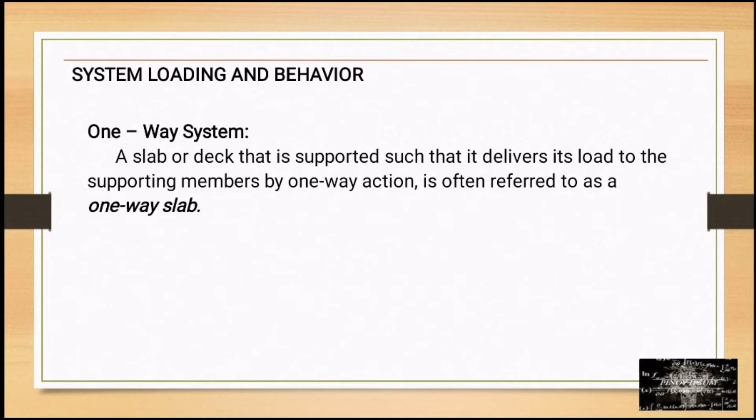We have two systems to determine whether the slab is two-way action or one-way action. Number one, a slab or deck that is supported such that it delivers its load to the supporting members by one-way action is often referred to as the one-way slab. According to ACI code, if the span ratio L over S is greater than 2, the slab will behave as one-way slab.

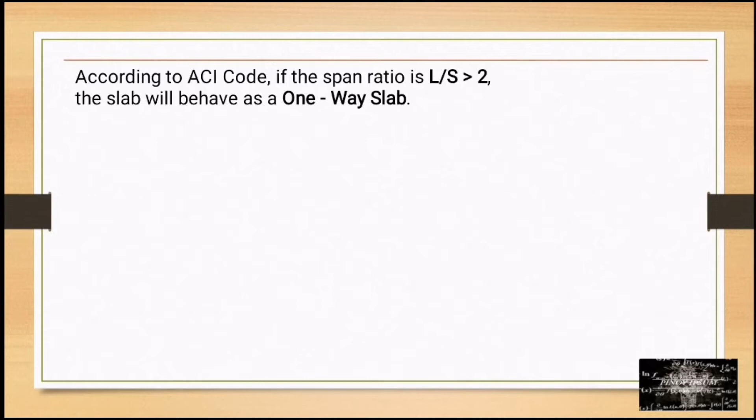So this is how it looks. We have WE equal to W times S over 2, expressed in kilonewton per meter, where L is the longer side, S is the smaller side, W is equal to the total load at slab expressed in kilopascal, and WE is equal to the equivalent uniform load expressed in kilonewton per meter.

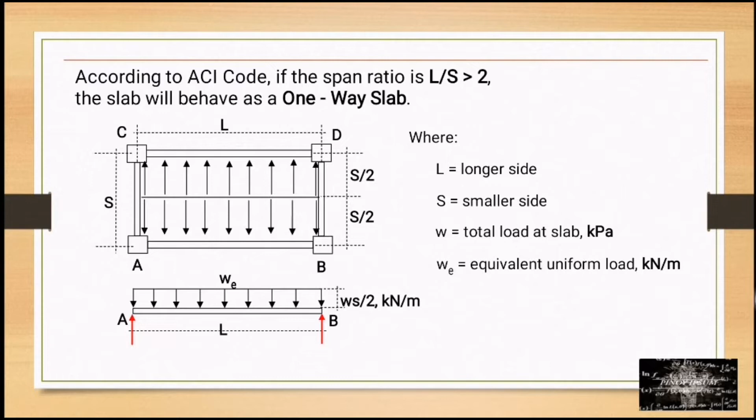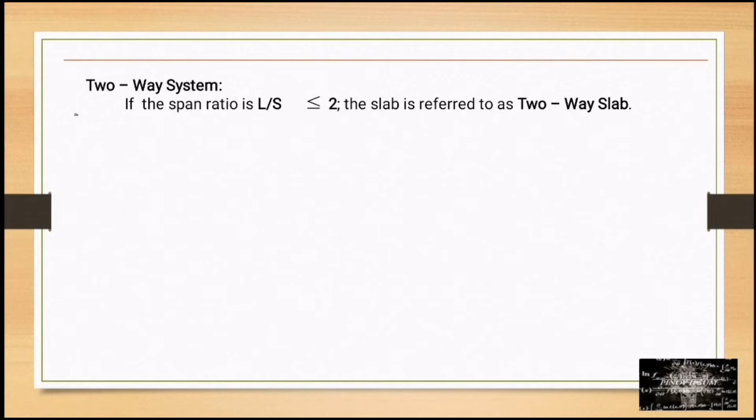Number 2, the two-way system. If the span ratio L over S is less than or equal to 2, the slab is referred to as the two-way slab. So this is how it looks - it has trapezoidal and triangular load, where L is the longer side and S is the smaller side.

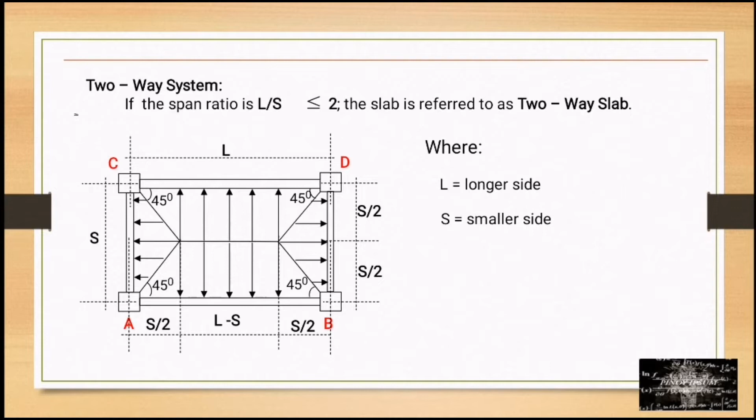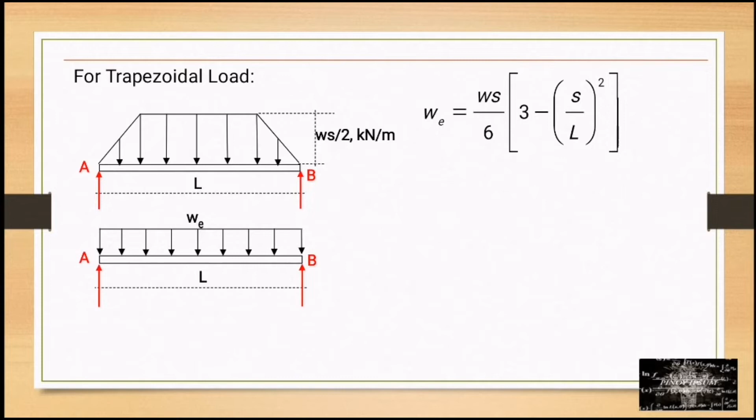For trapezoidal load, we have the intensity WS over 2 expressed in kilonewton per meter. For the conversion to uniform load, we have the formula WE equals WS over 6 times (3 minus (S over L) raised to 2), where W is the total load at slab expressed in kilopascal and WE is the equivalent uniform load for trapezoidal load expressed in kilonewton per meter.

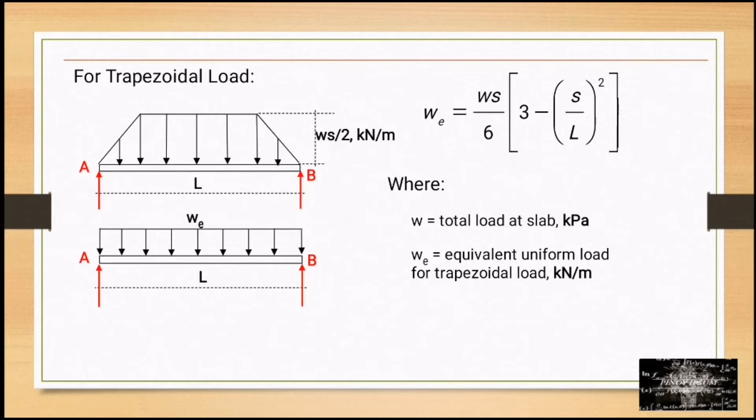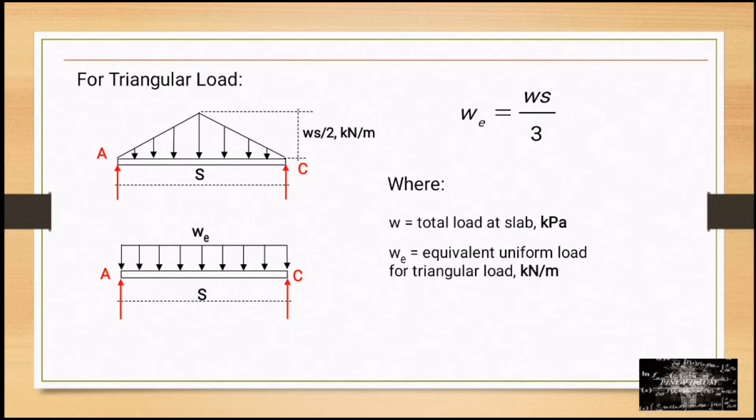Example number 1. The steel framework is used to support the reinforced stone concrete slab that is used for an office. The slab is 200 mm thick. Sketch the loading that acts on members BE and FED.

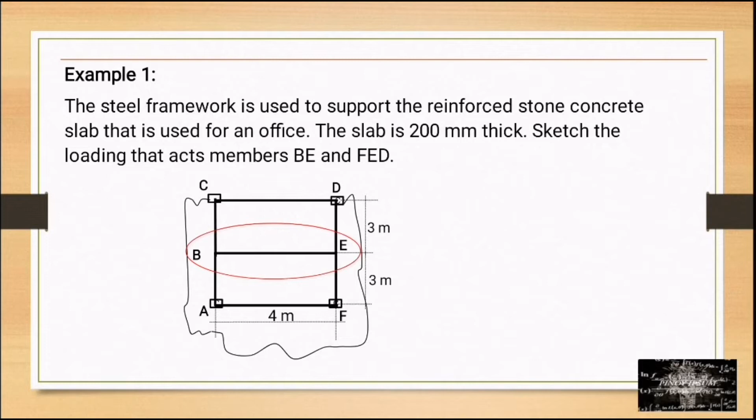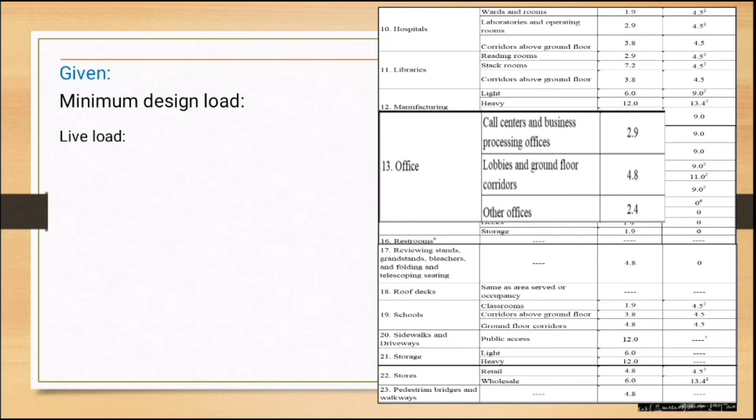Given: minimum design load. For live load, you can see on screen we have three options - call centers and business processing offices, lobbies and ground floor corridors, and other offices. Since the problem didn't specify the type of office, we use other offices, so we have 2.4 kilopascal.

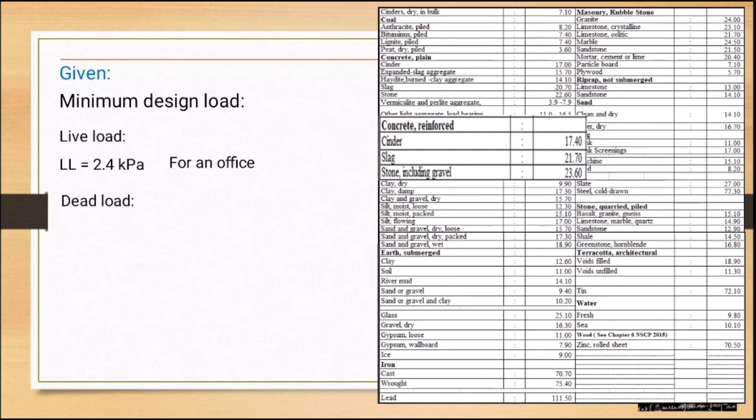Now for the dead load, we have reinforced stone concrete with density equal to 23.6 kilonewton per cubic meter.

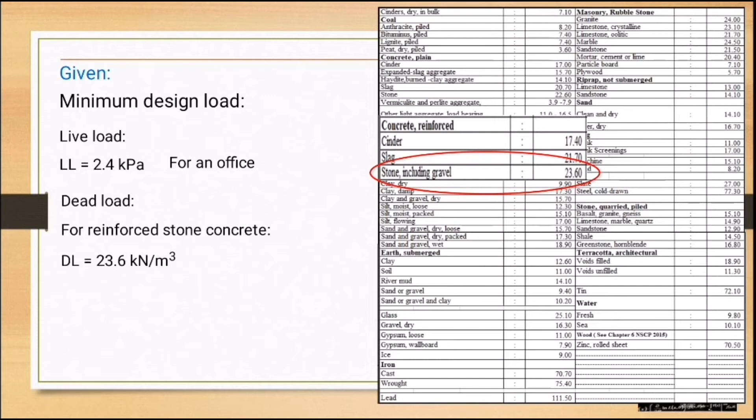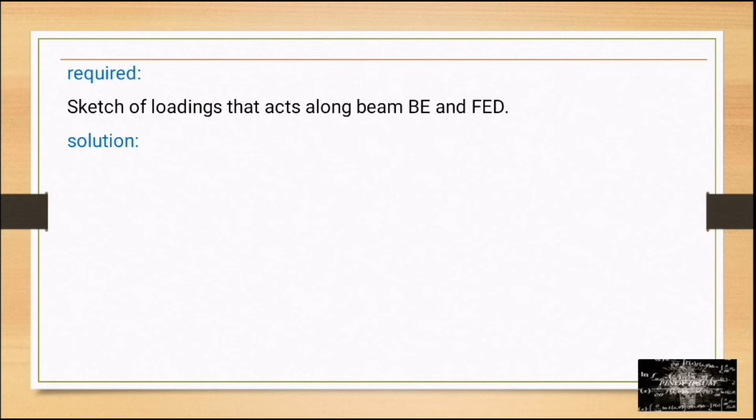The required is the sketch of loadings that act along beam BE and FED. Solution: let us check the system of slab. L over S equals 4 over 3 equals 1.33, which is less than 2. Therefore our slab is a two-way slab.

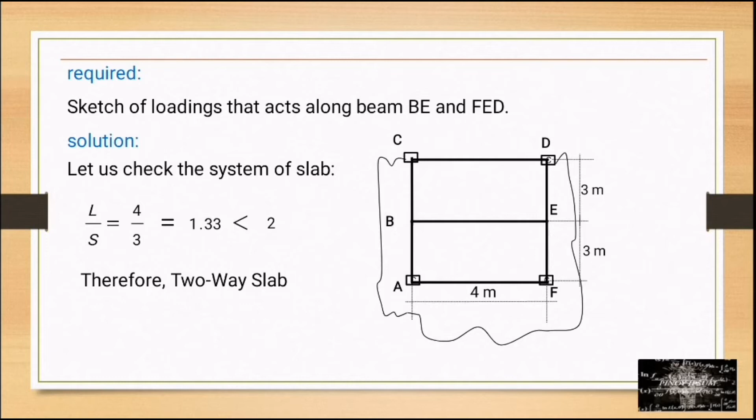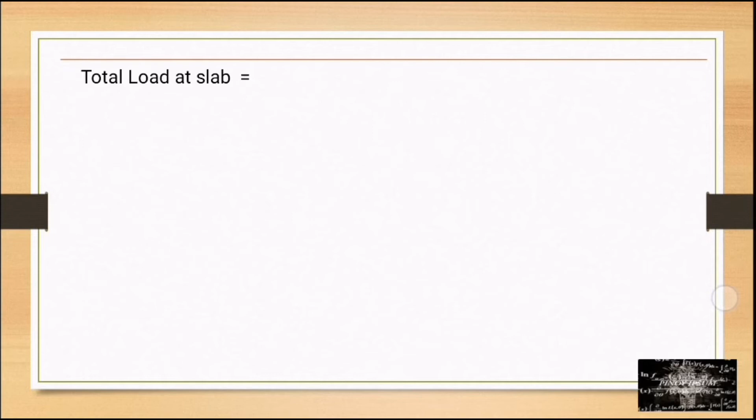Now for the total load at slab, we have dead load plus live load equals 7.12 kilopascal.

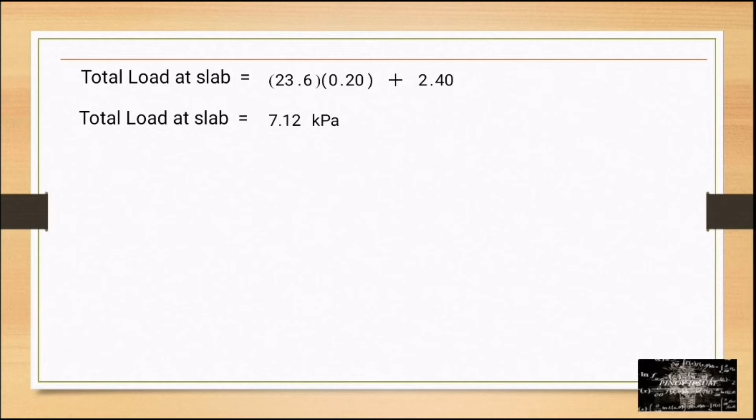Now for beam BE, we have trapezoidal load. The intensity equals WS over 2, equals 7.12 times 3 over 2. Since it's on both sides, we multiply by 2, so W equals 21.36 kilonewton per meter. This is the intensity.

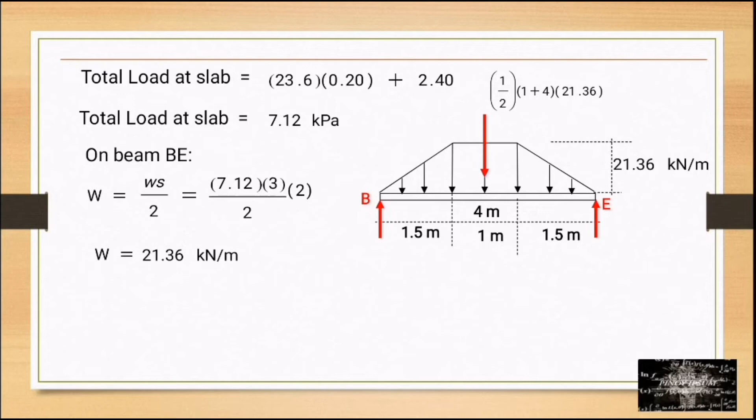Now we need to solve the reaction to transfer it to beam FED. We have the distance, which is 1.5, S over 2. We get the resultant - area of trapezoid: 1/2 (1 plus 4) times 21.36, equals 53.4 kilonewtons. So we have the reaction, which is symmetrical, giving us 26.7 kilonewtons.

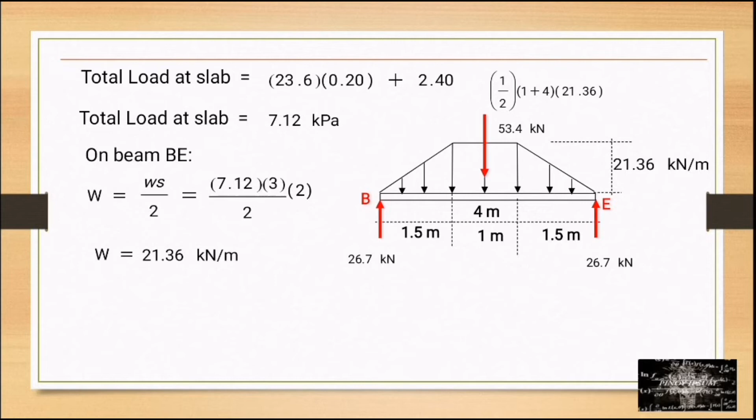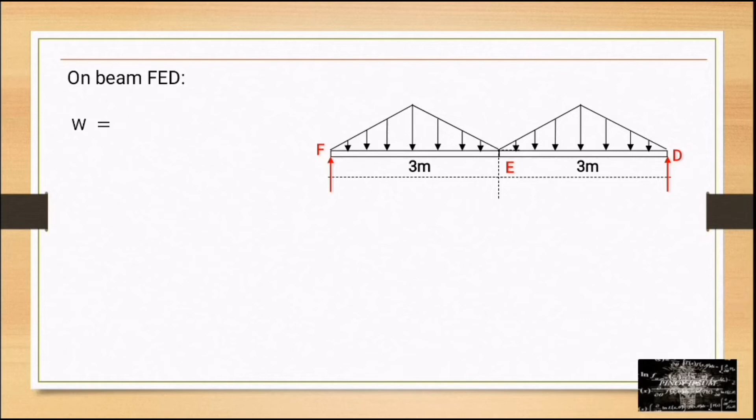Now for beam FED, we have triangular loadings. The intensity equals WS over 2, equals 7.12 times 3 over 2, equals 10.68 kilonewton per meter. This is the intensity.

Then for point E, we have beam BE, so we need to transfer the reaction to point E, which is 26.7 kilonewton.

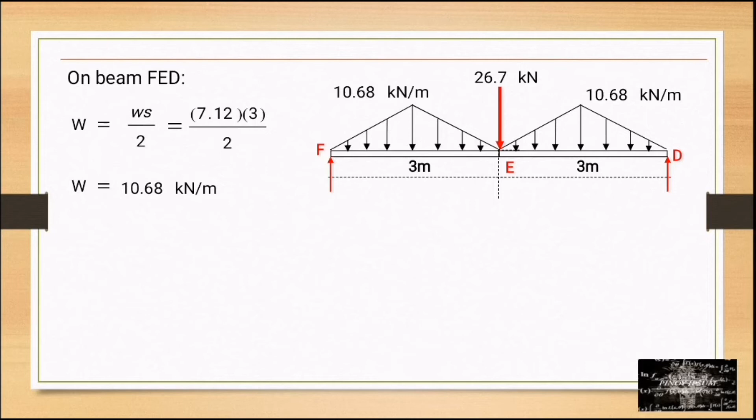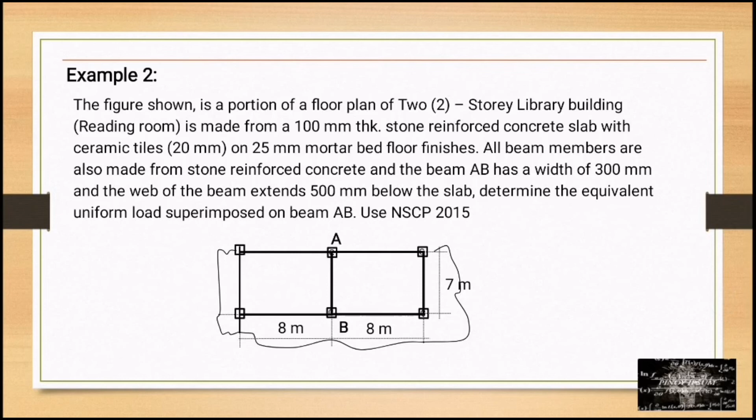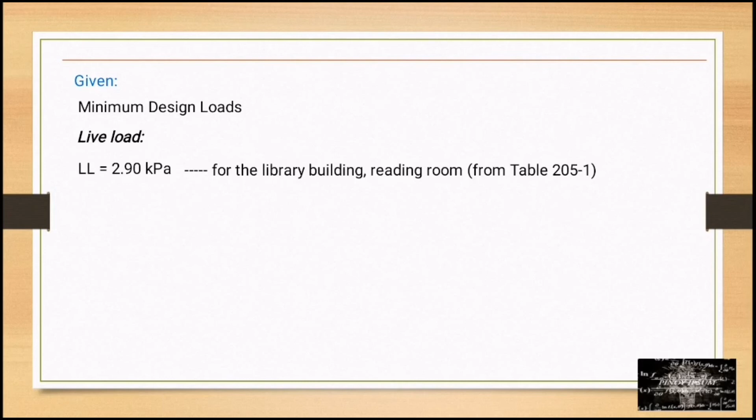Given: minimum design loads. Live load is 2.9 kilopascal. For the library building, from table 205-1, dead loads - we have stone reinforced concrete slab and beams with density equal to 23.6 kilonewton per cubic meter.

Now from table 204-1, for ceramic tiles we have 1.10 kilopascal. From table 204-2... Now for the beam dimension, we have 300 mm by 500 mm.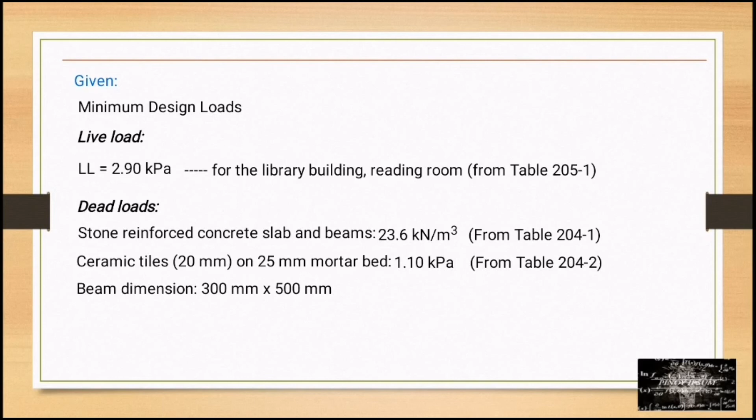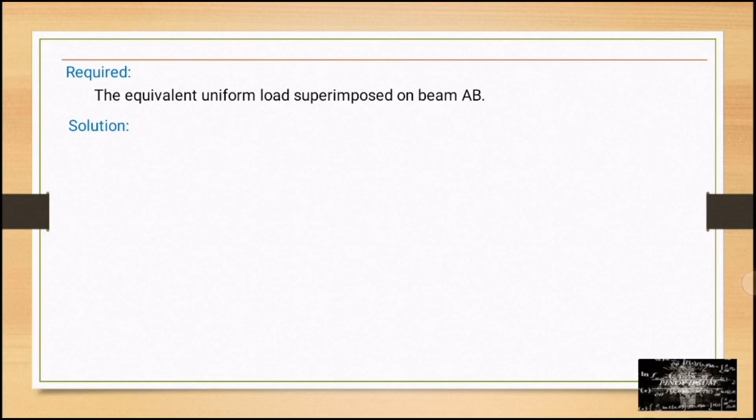The required is the equivalent uniform load superimposed on beam AB. Solution: we need to check the system of slab. L over S equals 8 over 7, equals 1.14, which is less than 2. Therefore our slab is a two-way slab.

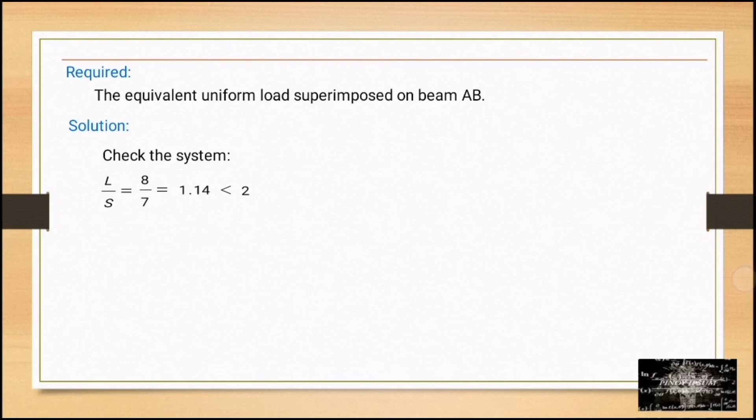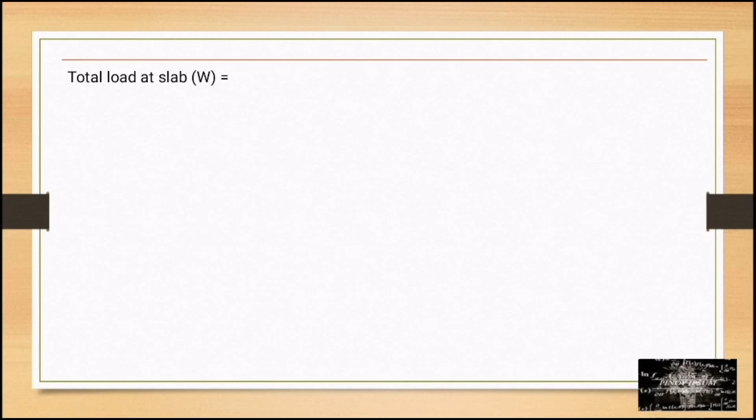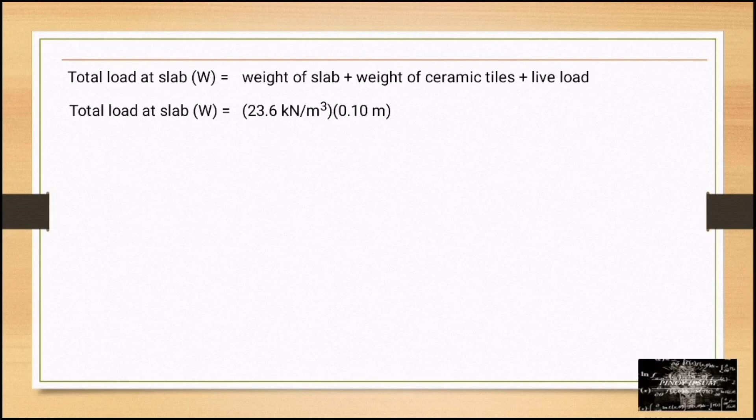So this is how it looks. For the total load at slab, it equals weight of slab plus weight of ceramic tiles plus live load. We have 23.6 times 0.10 plus 1.10 plus 2.9. Total load at slab equals 6.36 kilopascal.

Now for the beam weight, we have 0.3 times 0.5 times the density 23.6, so our beam weight is equal to 3.54 kilonewton per meter.

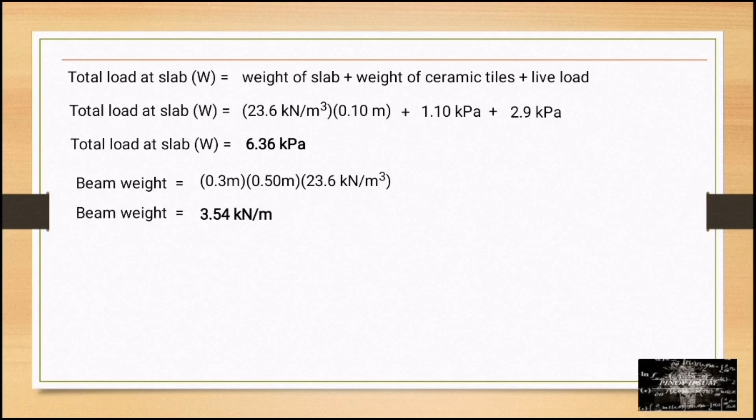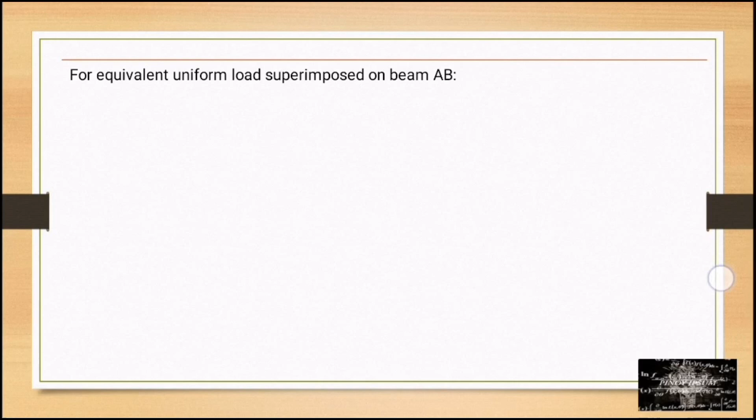Now for the equivalent uniform load superimposed on beam AB, we have WE equals triangular load plus the beam weight, or equals WS over 3 plus beam weight. So WE equals 6.36 times 7 over 3. Since our triangular load is on both sides, we multiply by 2, plus beam weight of 3.54. So WE equals 33.22 kilonewton per meter.

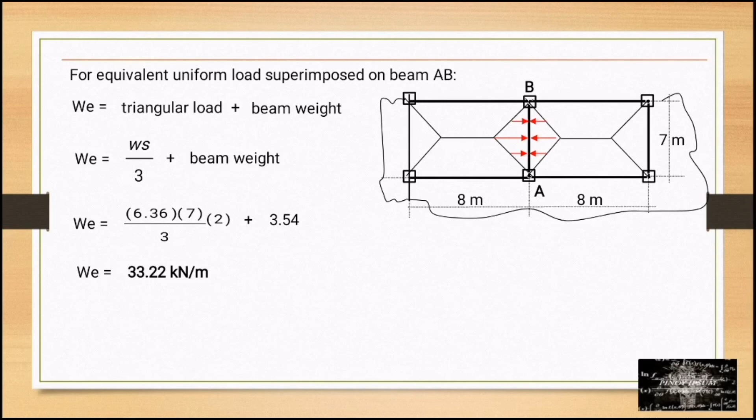So this is the final answer. Then here is the sketch.